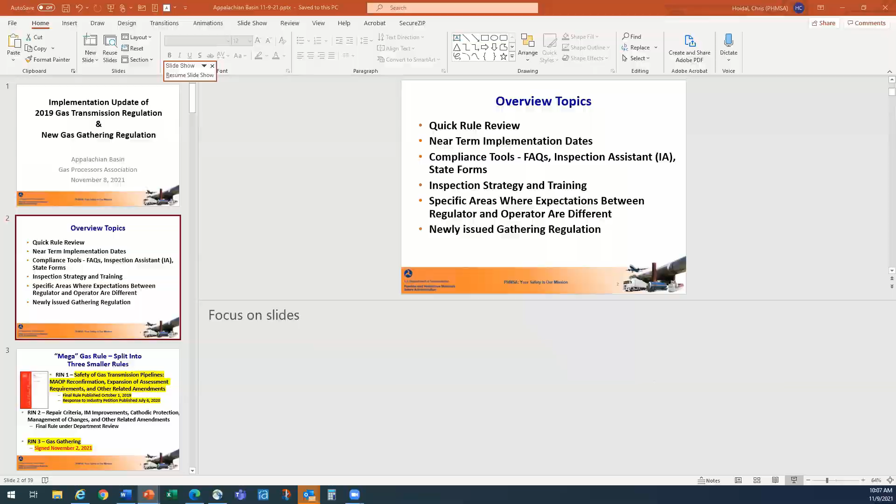Yeah, so I'm going to give a quick status update on the 2019 gas transmission rule, some implementation dates that have occurred in the last few months, some of the compliance tools that the operators and the regulators can avail themselves of, how PHMSA and the states are currently conducting our 2019 inspections. Some areas where there's a little bit of, I call rough spots, between what the operator is doing and what we expect. And then the last half of today, I'm going to talk about the newly issued gas gathering regulation. When I say issued, it's been signed. It has not been posted to the Federal Register.

So you're going to hear this term a lot. It's thrown around by consultants, operators: RIN 1, RIN 2, RIN 3. It's basically where they took the mega rule that was proposed all the way back in 2011, and they made a decision to carve it up into 3 parts. RIN 1 is what I'm going to be talking about mostly today. It's the gas transmission regulation. And it was basically addressing San Bruno, where you had a rupture of a grandfathered pipeline where the company didn't know the materials they had in the ground.

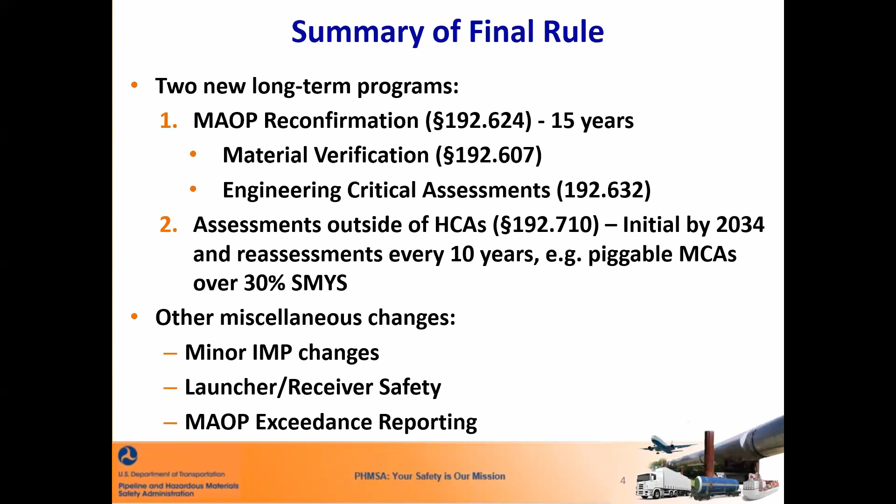A second part of the rule that has a long timeline to it, but it's very important, is doing assessments outside of high consequence areas. It needs to be done by 2034, and reassessments have to be done every 10 years thereafter. And then there have been changes to integrity management, launcher receiver safety, MAOP exceedance reports, but today I'm just going to focus on those first two long-term programs.

So if any of you have transmission lines and you need to have MAOP reconfirmation, the stuff I'm going to highlight in the next few slides is what inspectors are focusing on now. They want to make sure, and this is what the code requires, that any MAOP pressure exceedances are reported. That actually went into place last year. And they need to be reported like they're a safety-related condition. What's different about this: if you have a safety-related condition and you fix it before the reporting deadline, you don't have to report it. In this case, you must report all pressure exceedances, where it exceeds MAOP, regardless of whether or not you corrected the root cause of the problem.

Another part of the regulations that went into effect in 2020 was you need to document how you establish your class locations. There are some new IBR documents, mostly with respect to pigging and ILIs and ILI interpretation, in the 2019 gas rule. And then companies last year were supposed to start identifying what areas on their pipeline are going to need to have assessments outside of HCAs. So that was all due last year.

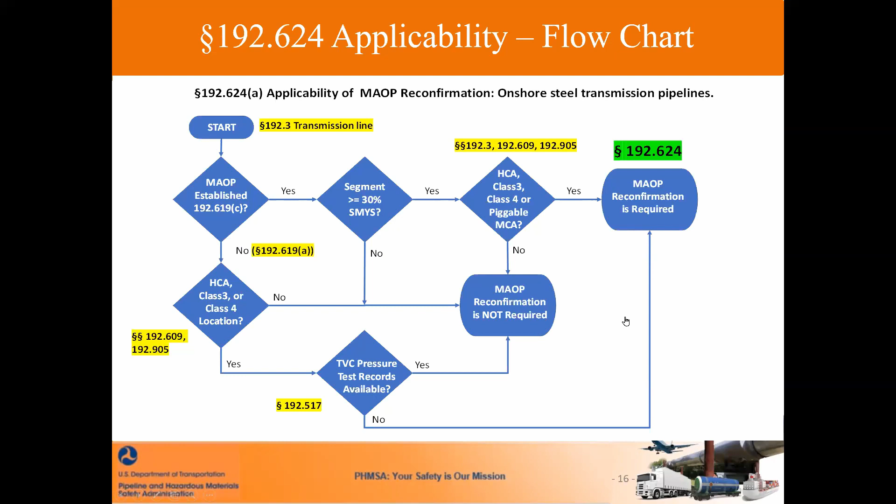The point I'm trying to make is the regulations are hard enough to understand as is. We added these flow charts as a way to help navigate the regulation and give you some clarity of what you should be complying with.

Inspection strategy training. We did 5 pilot inspections of operators that ended last April. They were Southern Star, Boardwalk, Iroquois, Louisville Gas, and Dominion Questar. So we test ran our inspection questions. We test ran our flow charts. We stole some flow charts where we could. Obviously, we asked permission, because some of the operators were using them to untangle their thoughts. So we did those pilot inspections, we reworked our inspection questions, and that's what we posted to the website late June.

Now we are currently conducting specialized inspections. Both feds and states are doing that. When I say they're specialized, they're just focused on the new parts of the regulation. Most people said this is hard enough as it is. We don't want to mush them together with an existing inspection, maybe for a control room, or just a standard inspection. They actually took the new regulations and are just focusing on that.

Some regions went the other way, and they're trying to combine them with scheduled integrated inspections. I think they're quickly learning that this is too much to take on at any one time. So most states and most federal regions are doing specialized inspections for the gas rule, and they are underway at this time.

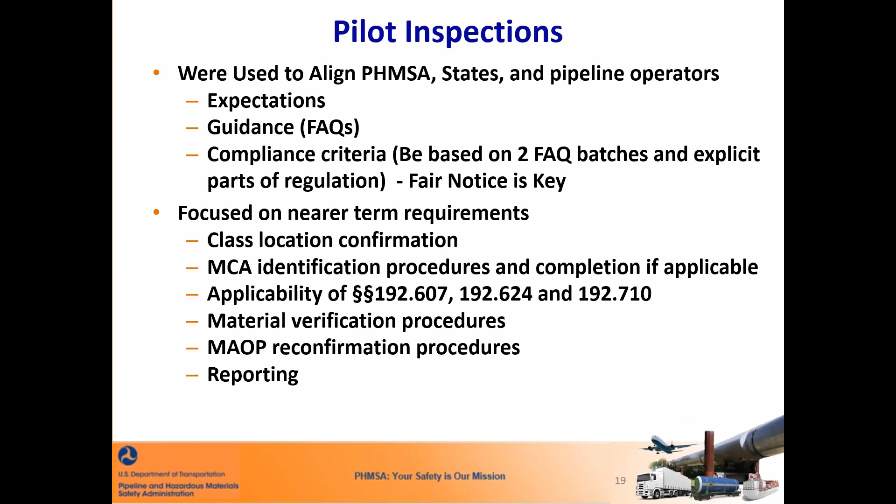But if you know people at these companies, probably the most important thing is ask them how the inspections unfolded. They all volunteered. I can't attribute the goods and the bads to them, but they can at least give you some insight of what they encountered during the course of the inspection. And they actually even have the inspection questions with what I call considerations, where we actually said what we were looking for in a little bit more detail.

So what did we find during these pilots? What went well? The companies that did best all had a pretty robust GIS database. And they basically overlaid their TVC records, that's traceable, verifiable, complete records, and MAOP records with maybe their integrity management records. Many of them had them integrated with their alignment sheets. It was impressive, and obviously companies had a long time to prep for this because they aggregated a lot of information and they presented it in a very ordered way.

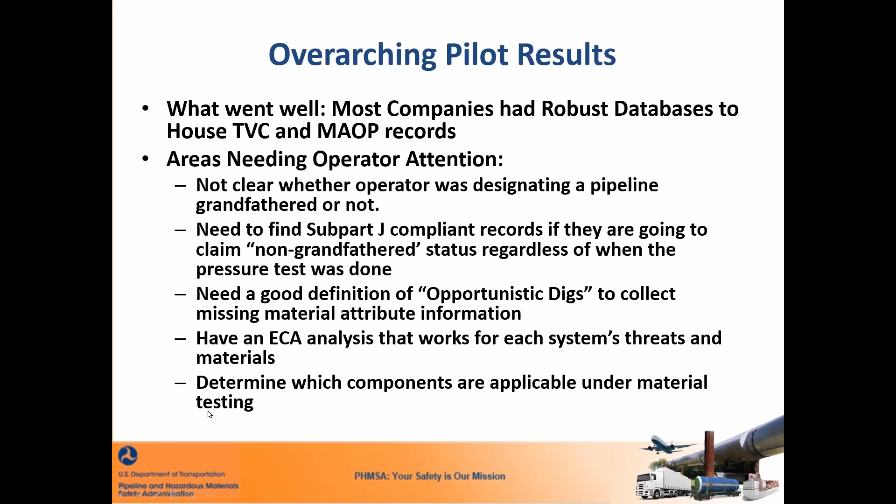For example, on a blowdown stack, we want to know about the first valve off the main line. We want to know what the rating is. Stuff further downstream, above it, we don't need to know that. But we want to know anything that you can't isolate off the main line. Those we do want to know what the component ratings are. You don't need to collect toughness or Charpies, but we do expect you to know the rating of those components. So those are the overarching pilot results. And when you guys try to demonstrate compliance, focus on those topics.

Training: we've had 4 classes. 59 state inspectors have been trained from 43 different states. So the bulk of the states have been trained. There's only 48 state programs, so just a handful have not gone through the training. And of those, most of them didn't have any significant transmission mileage. There have been 22 federal inspectors trained. So there is a cadre of inspectors that have been trained, and the focus has been on consistency and clarity, because we want everybody rolling out the regulations in the same way.

Okay, you guys are going to go nuts when they come back and ask you questions that you thought you had already gone over years ago. But since original MAOP determination is so important, we've asked the inspectors to go back and look at your MAOP and how it was established for 619. And one thing that I want to mention is there was not much focus on how inspectors were ensuring the operator revised their MAOP based on class location changes.

611. I was surprised. I went back and looked at the inspection database and very few questions were asked around 611. I was kind of disappointed about that. So you may see a renewed vigor on that. Like I said, MAOP determination, classification, the resulting MAOP revisions, those are all key to deciding how you move forward with the new regulation.

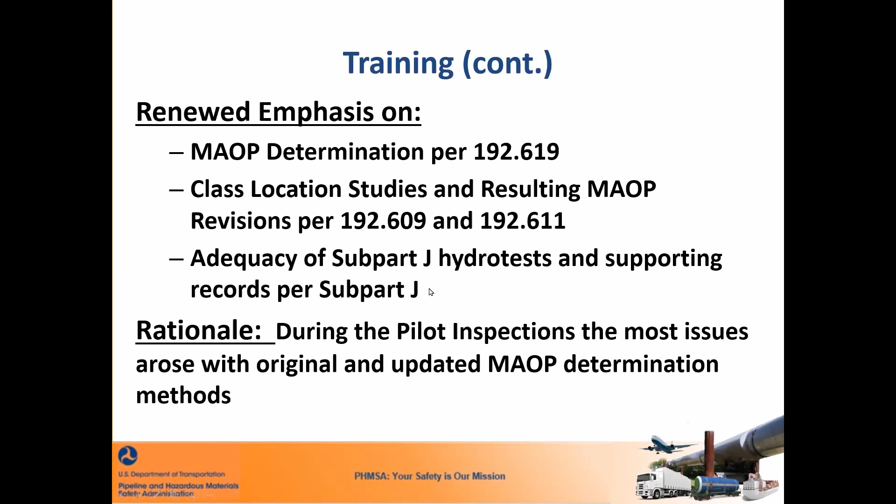You're going to see these inspections being conducted on a pipeline system basis. You're not going to see all the TransCanada systems being done at once or all Enbridge's systems being done at once. You're going to see it on a system by system basis, except for maybe the procedures. And if you have some overarching procedures that apply to multiple systems, they may look at that.

The interstate systems, we'll target those. And we're going to use the March 15th, 2021 annual report that was submitted last year as a starting point. We're going to focus on grandfathered pipelines that are in class 3 and 4 areas or have an HCA. The feds are going to use this IA software program. And they're going to focus mostly on what pipelines fall under the new regulations.

Intrastate, they're using an analogous form. It's basically our IA software, but when I say analogous, it's basically a paper version of what's in the software program. And that's what's on the website that you guys have access to.

Okay, like I said, there were some sticky points between us and the operator. Expectations, areas of disagreement, I don't know what you want to call it, but yeah, there are still some rough spots. I think these are the 4 biggest rough spots. As we mentioned, what pipelines are in and what pipelines are out, which ones have to be reconfirmed.

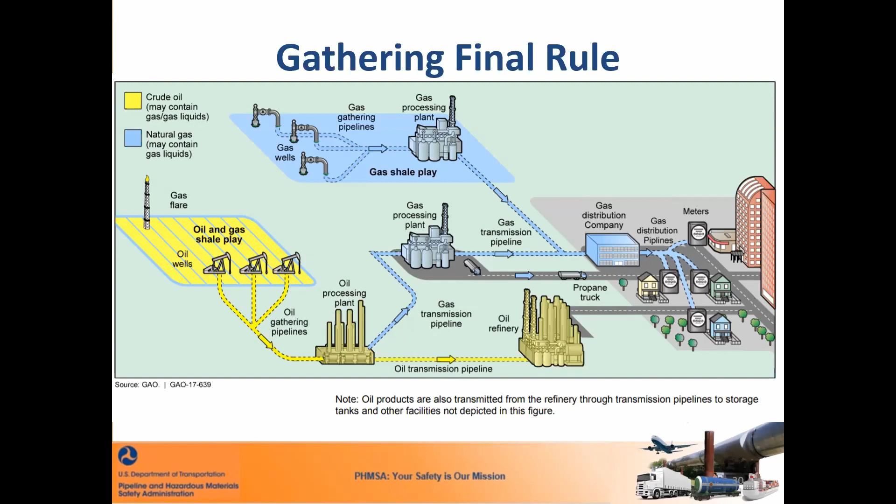The key thing about the regulation is it gets away from the old 2-tier approach to gas gathering. Since 2005, I think it was, we have had type A and type B gathering. A larger set of regulations applied to type A. It was for class 2 through 4. And then for lower pressure pipelines in class 2 through 4, you had a subset of that. There was discussion back then about having a basic level of safety requirements for things that are in class 1 areas.

But it's funny, if you go back and look at the 2005 regulation, it actually said, hey, it's not a problem. These gathering systems in class 1 are typically lower pressure, smaller diameter. Well, a lot of that has changed since 2005. Because of all the hydraulic fracturing and production, you have a lot of larger diameter pipelines in class 1 areas that are behaving just like gas transmission lines. So we were directed by the GAO and Congress to come up with additional safety measures for pipelines in class 1 areas.

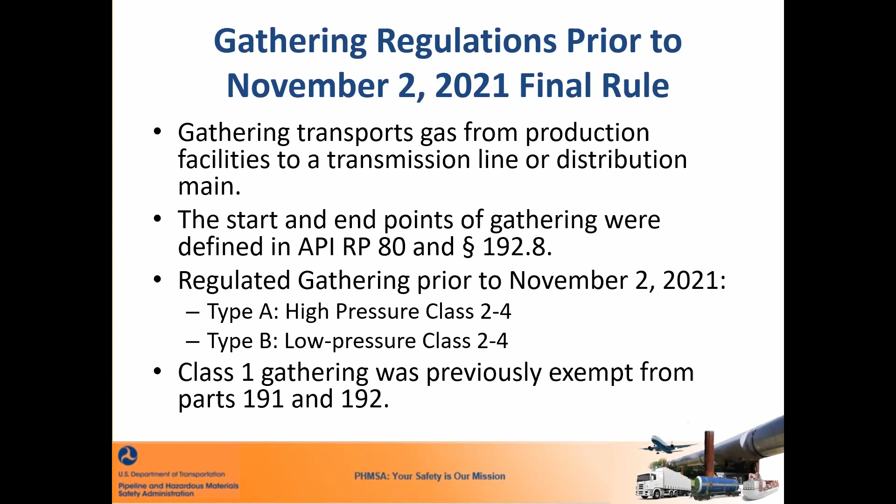So we said, okay, we already have type A, we already have type B. The logical response is to create something for these larger diameter, higher pressure pipelines in class 1. This is a new term, guys: type C pipelines. So now you have type A, type B, and we're going to introduce type C, which is high pressure pipelines greater than 8 inches operating over 20% of SMYS. There'll be about 90,000 miles of type C pipelines nationwide affected by this new regulation.

So okay, got type C, set that aside. On the other side, what do you do about all the other gas gathering pipelines? You will now be required to report, not take any safety measures, but anything that's not a type A, type B, or type C, you're going to have to report as, I don't know why it's R, a type R pipeline. For a type R pipeline, you just have to report information on an annual report and on incident reports as well.

So 2 new terms got introduced by this new regulation. Type C, new safety standards. Type R, for anything that's not a type A, B, or C, you're going to have to do some reporting. And when I say reporting, let me see if I can find this. I'm going to try to bring this over. Do you see a form here, Drew?

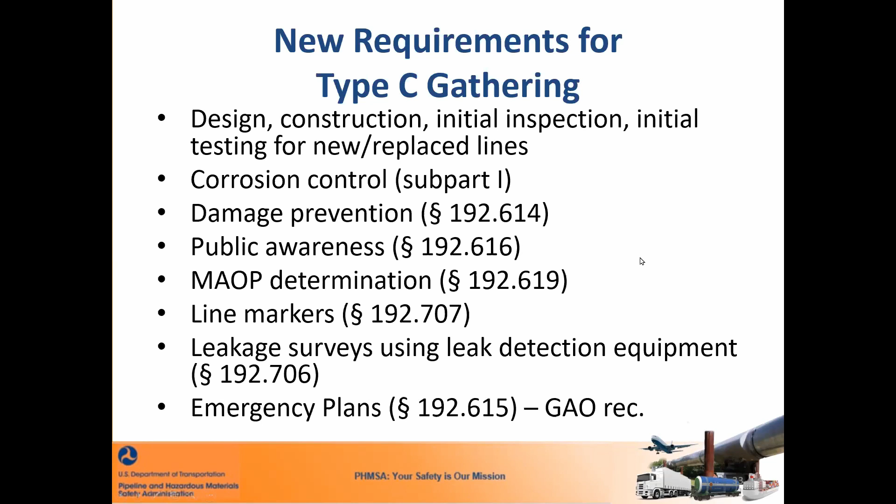So let's talk about it. So bottom line, let's do this up front. All gas gathering lines are going to have to be reported. If it's a type C, it's going to be reported on the old form. If it's an unregulated or type R pipeline, it's going to be reported on a new form. So it's going to impact 2 forms.

This is something I haven't fully explored, but it looks like the use of incidental gathering is going to be limited to 10 miles or less. So before, as stuff came in, you could keep resetting the clock and it would remain gathering as long as you kept having inputs to the pipeline. This now limits it to 10 miles. And after 10 miles, it's considered a transmission line.

And that kind of brings us full circle back to what I was talking about with the MAOP reconfirmation regulation. If it's all of a sudden gone from what you may have considered gathering before, it may now be considered a transmission. So yeah, incidental gathering is now limited to 10 miles or less, and that is a departure from RP 80. From what I can read, there were no other definitional changes adopted, just that one.

Here's the breakdown of what's covered as a type C. There's 91,000 miles of type C pipeline. They have to do the damage prevention and emergency response planning. Okay. Of that 91,000, 20,000, because of where they are and their characteristics, also have to do public awareness, line markers, and corrosion control leak surveys. And then an even smaller subset of that is subject to MAOP requirements. So 91,000 is the total type C pipelines, but as you get more and more risky pipelines, you have to add more and more requirements.

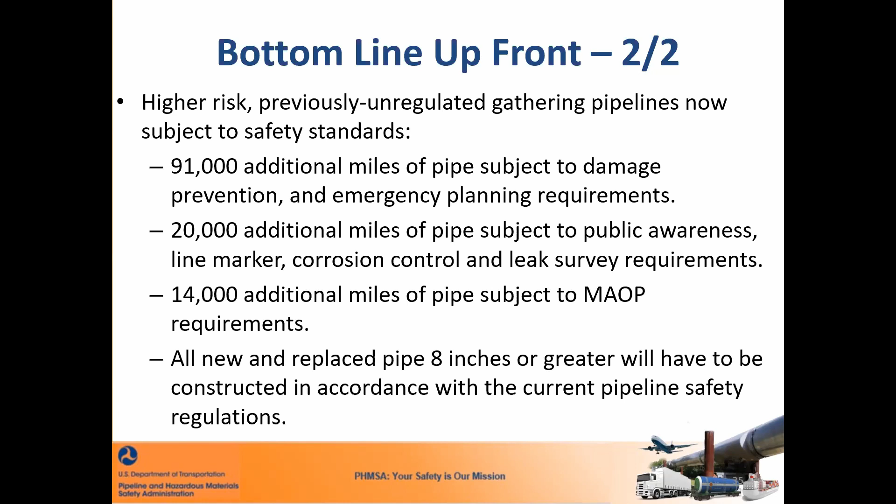Here's another way of looking at it right here. This is a key slide. Reporting, all gathering, it's over 400,000. Design and construction, that's only for new and replaced. Damage prevention, anything greater than 8 and 5/8. Same thing, emergency plans. They apply to all type C.

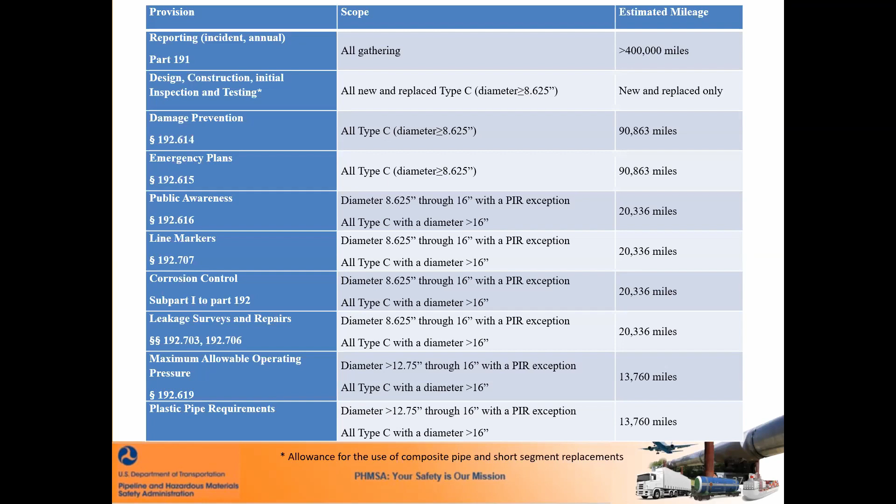Then as you get a little bit bigger, between 8 and 5/8 and 16-inch, if you can show you can't impact anybody, you don't have to do this, but anything greater than 8 and 5/8 to 16, you got to do public awareness, line markers, corrosion control, leakage surveys. And then when you get bigger than that, you have to start applying 619. There's some for plastic pipe. I'm not too sure what that is. So this is kind of the tiered approach to what applies to these type C pipelines. It's dependent on diameter and proximity to people.

Here's another way of cutting it. So like I said, I was pulling information from different places. I actually found this slide to be the most useful. I'll let you guys absorb this right now for a few seconds.

So only a couple of things apply for the smaller diameter pipelines, but as you get bigger and bigger and impact more and more people, more and more stuff kicks in. So I think this is the operative slide that you guys want to look at. That's it. Drew, any questions after that? I'm going to leave this slide up because I think, like I said, this kind of sums up the new rules.

Drew, can you hear me? Sorry, yeah, I can hear you. Okay.

So we'll open it up to questions now. Sure. Either on the 2019 gas rule for MAOP reconfirmation, or just be kind to me about the new gas gathering regulation, because I just read it for the first time over the weekend. All right. If anyone's on the line, just unmute yourself and feel free to ask a question. Okay, it looks like we got one coming in on the chat.

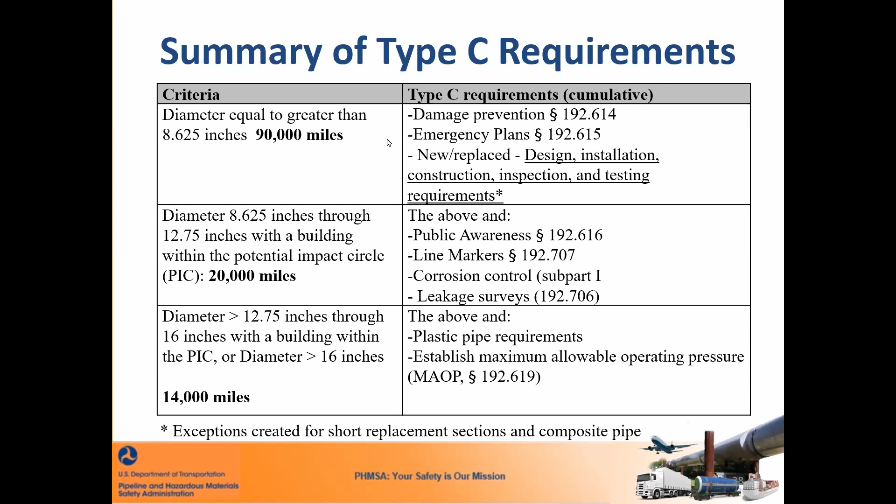I want to bring up, let me get out of here for a second, okay? I'm gonna try, one second. Let me see if I can share. Are you seeing a website right now? Yes. Okay, let's find out where this is.

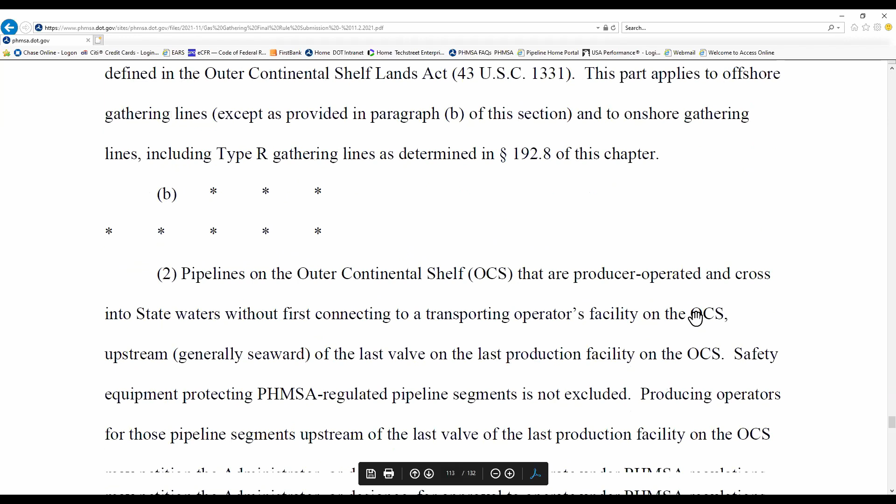So it's not published in the Federal Register. So here's the PHMSA.dot website. Go to the latest news and actions. This is where you see this. They have actually put the regulations up here. Again, I caution you, this has not been published in the Federal Register. But this is an important exception, because if you're in the middle of nowhere and you're less than 16 inches, you possibly could be exempt from part of the regulation.

I apologize for making you guys nauseous as I go through this.

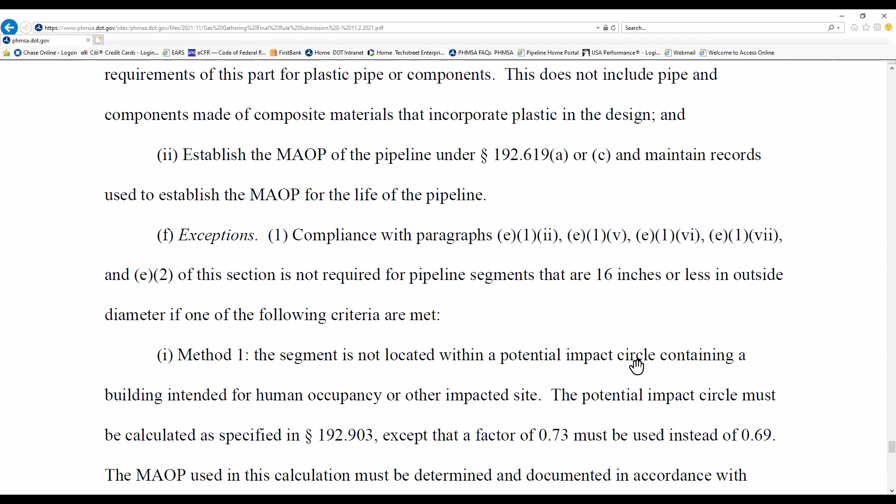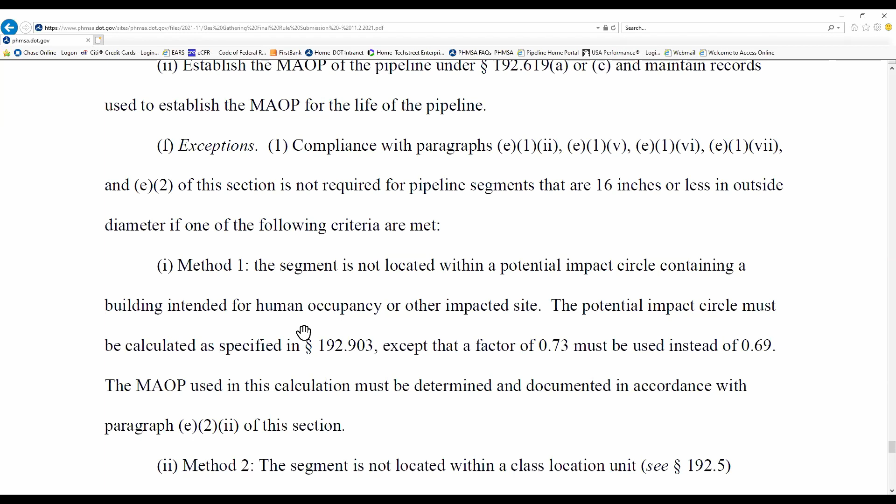192.9(f). I hope this answers whoever asked that question. Exceptions right there. So if you're less than 16 inches and you can't impact any building intended for human occupancy or other impacted site, you don't have to do it. The other one is the segment's not located within a class location unit. So basically, I have to look at this more closely.

The other method is, I guess, you determine your class, but let's say it's class 3, but your PIR can't impact any. Let's say everything is outside of your PIR. So yeah, these are two exceptions for whether or not you're considered Type C. This one's a little bit harder to understand: segment is not located within a class location unit.

Obviously, if you're class 1 and you have no buildings, you're out. I wonder though if this applies to, let's say you're a class 3, but you can't impact. No, I think this is almost like a class 0. You basically have a sliding mile with no buildings. That's how I would read it. Like I said, you're catching me right after the rule came out, so I apologize.